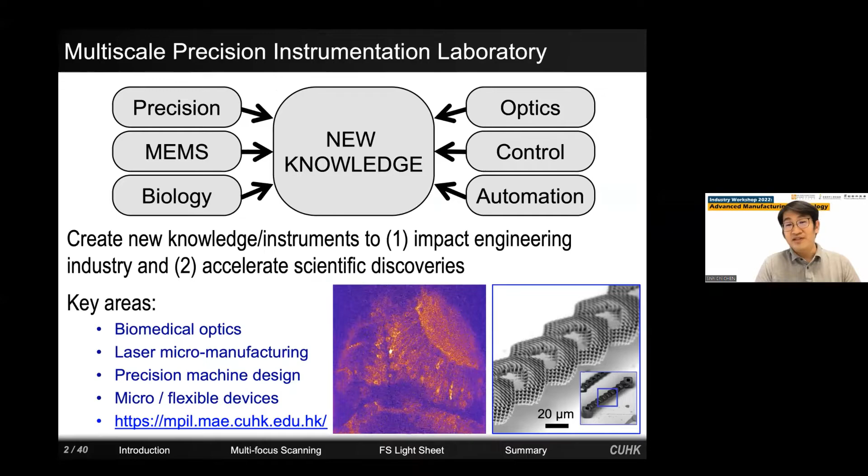I'd first like to thank Zijian for the introduction and welcome everybody to the seminar this afternoon. I'll take the opportunity to share some research progress from my lab in the area of micro-additive manufacturing and 3D nanofabrication. Before I start, I'll briefly introduce my lab. Our lab focuses on generating scientific knowledge in designing ultra-fast imaging systems, precision machines, and laser fabrication systems. Today we'll be focusing on laser fabrication systems.

3D printing technology has revolutionized the engineering industry in the past two decades. Although there has been a lot of rapid progress and development in the field, there are still great challenges, especially in the area of micro-additive manufacturing. Although there are methods that can create sub-200 nanometer features in 3 dimensions, the speed is prohibitively slow and the cost is extremely high.

I'll give an example. If you want to print a cubic centimeter sized object with 200 nanometer resolution, it would typically take 1 or 2 months and cost around hundreds of thousands of dollars. That is not practical for any industrial application.

So what if we were able to print sub-100 nanometer resolution at the scale and speed of a regular 3D printer, as shown on the right, at the same cost, and using all kinds of materials? Then we believe the engineering design process would be revolutionized again. Today I'll share with you some of our work that sheds light on this ultimate goal.

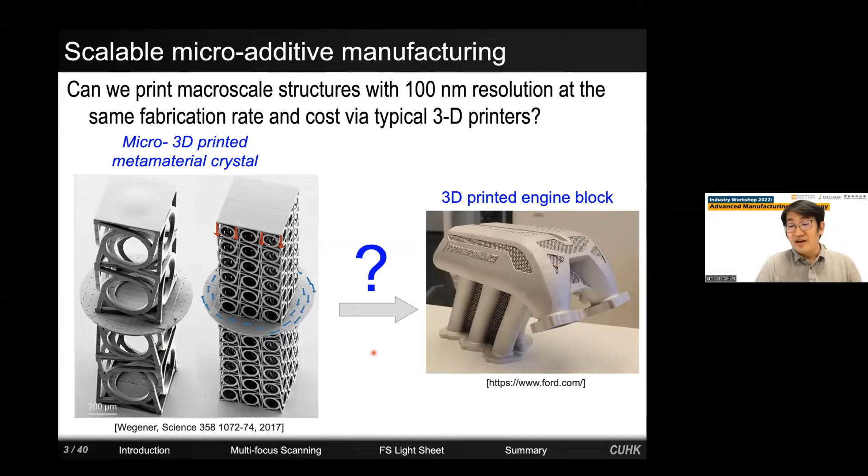To begin, I'll introduce the most precise 3D printing process: two-photon polymerization. The technology was first introduced in the late 90s, and everybody learned about it in 2001 through the seminal work from Kawata's group in Japan. Now everybody knows this nano-ox.

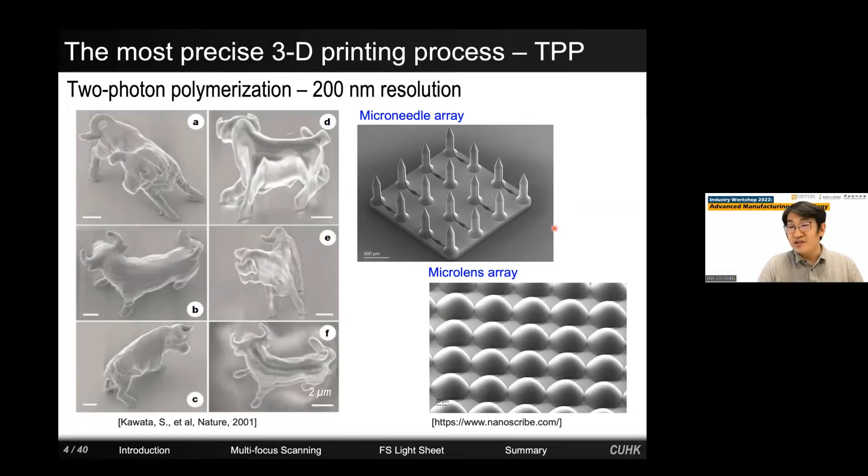A few years later, the technology was commercialized by a German company called Nanoscribe. Today, most universities and research institutions have a unit from Nanoscribe to print various micro to nanoscale devices for experimental verification or scientific research. The upper right corner shows a microneedle array for drug delivery applications, and the bottom right corner shows a micro lens array for imaging systems.

Although TPP is a photopolymerization process, you can actually extend the material to other areas through different methods. On the left, if you print TPP as a template and combine it with electroplating, you can create pure metallic structures. Many people also mix nanoparticles with photoresin to make functional devices directly - this example on the right shows piezoelectric devices printed directly.

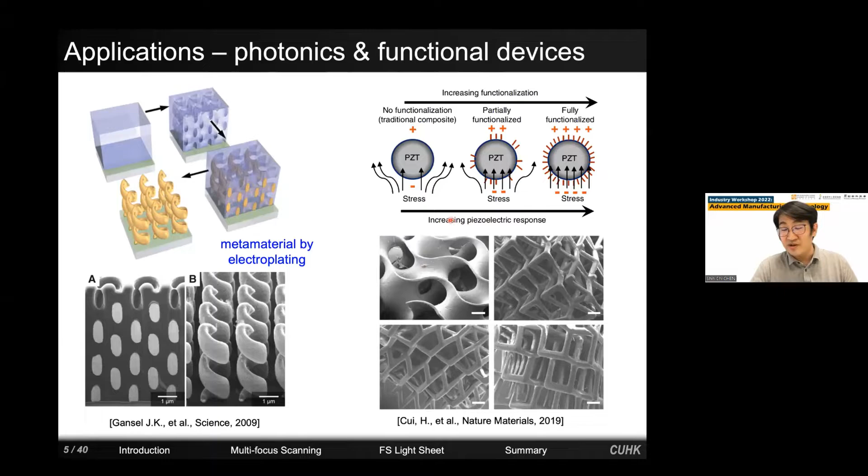If you mix in magnetic particles, you can create micro robots maneuverable in the body, or in vivo, which is a fast growing field. Another big area of application is directly printing biocompatible and biodegradable tissue scaffolds. All of these have been limited by high cost and slow printing speed.

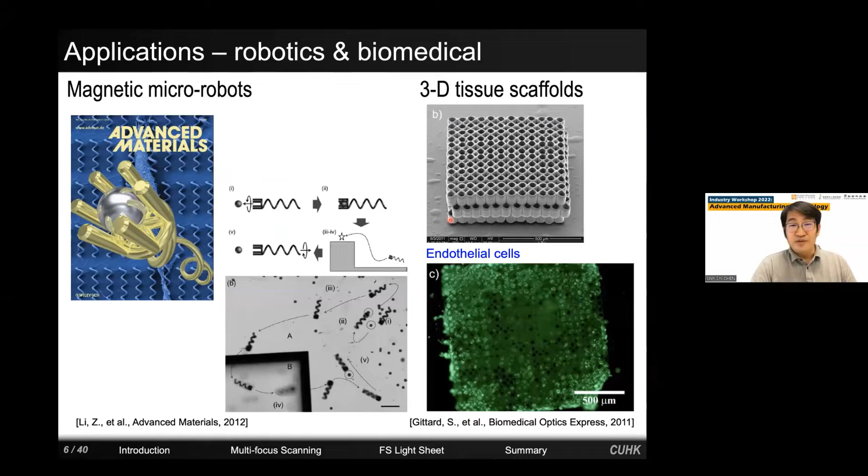If you wonder what TPP can do in terms of high throughput fabrication, in comparison with e-beam lithography or very expensive diamond turning, TPP can be used to make metallic molds. You start by fabricating complex 2D or 3D structures, then electroplate to make a metallic mold - of course, the polarity is inversed - and then you can use it with injection molding to make various parts.

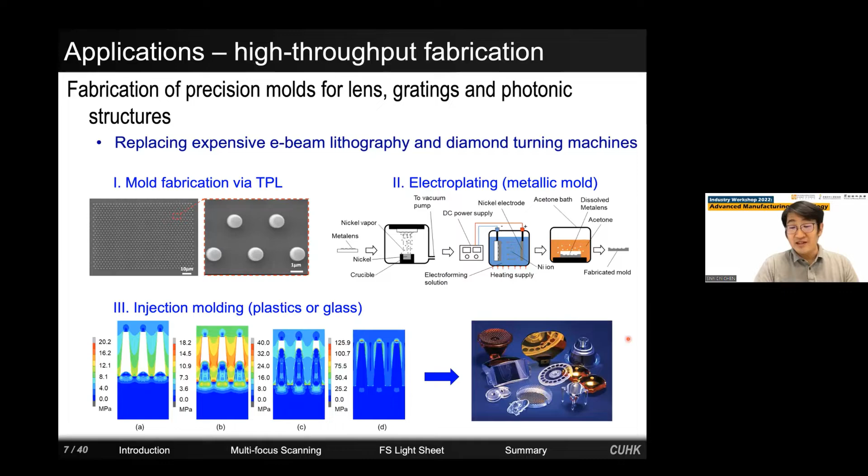And this will be one low-cost way to fast develop prototypes. Of course, this needs to be established on the fact that TPP is a low-cost and efficient process.

So next, let me briefly talk about the basic principle of two-photon polymerization. This is a process enabled by a nonlinear two-photon absorption process, enabled by the ultra-high peak power femtosecond laser. Due to the extreme high power within the focal point, two photons will be absorbed by an electron, as shown in the Jablonski diagram on the left.

It goes to higher energy states and releases free radicals that generate the photopolymerization process. In comparison with a conventional stereolithography process, the two-photon process has depth discrimination. In other words, it only polymerizes material within the focal point, which is much smaller than a size of 1 cubic micron. It is also very sensitive to a polymerization threshold.

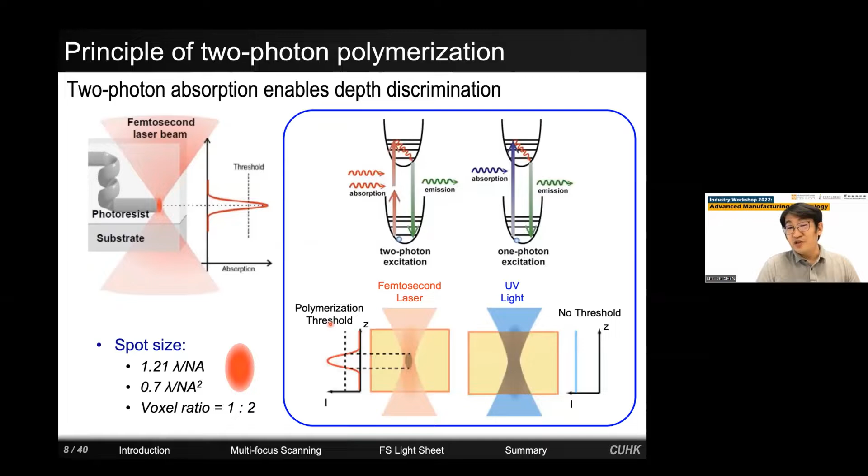So if you finely control the laser power, you can write structures much smaller than the diffraction limit. And that's why much smaller features than the wavelength of light can be created.

So this is what's been done in the past. People pair the femtosecond laser with a pair of scanning mirrors. As a result, by raster scanning the laser focus, voxels can be created in a line-by-line, layer-by-layer fashion. When one layer is completed, the laser is moved to the second layer by a specimen stage or piezoelectric objective scanner to complete the 3D fabrication process. And this is very slow.

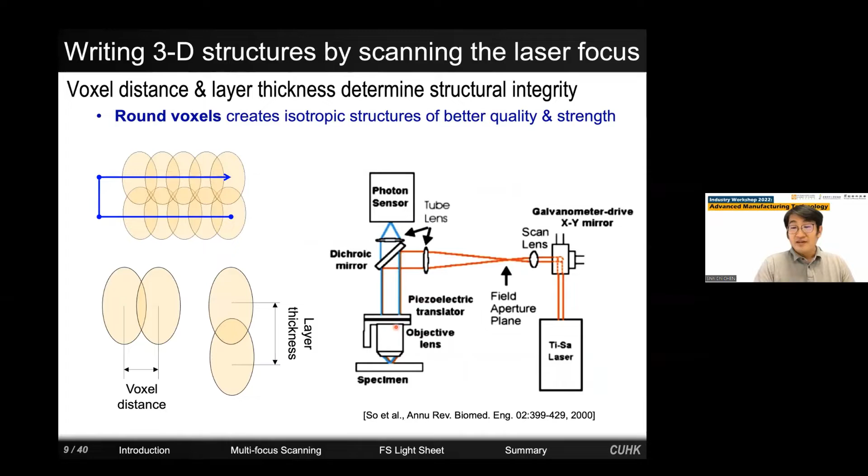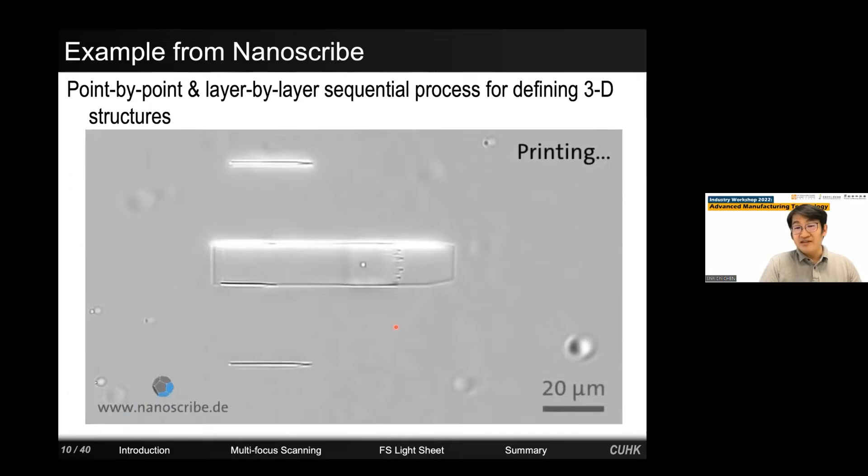This video taken from Nanoscribe illustrates this process. You can see, to print an aircraft as shown here, the laser is raster scanned horizontally as the fast axis, vertically as the secondary slow axis, and then it moves to the next plane. Although this process seems fast here, it is extremely slow because the entire thing is smaller than the diameter of your hair.

Let me talk about more of the process. During printing, the objective lens is immersed in the photoresin, which is in liquid form and has a refractive index of 1.5. So in order to ensure high resolution, a matching index objective lens is used - typically an oil immersion lens.

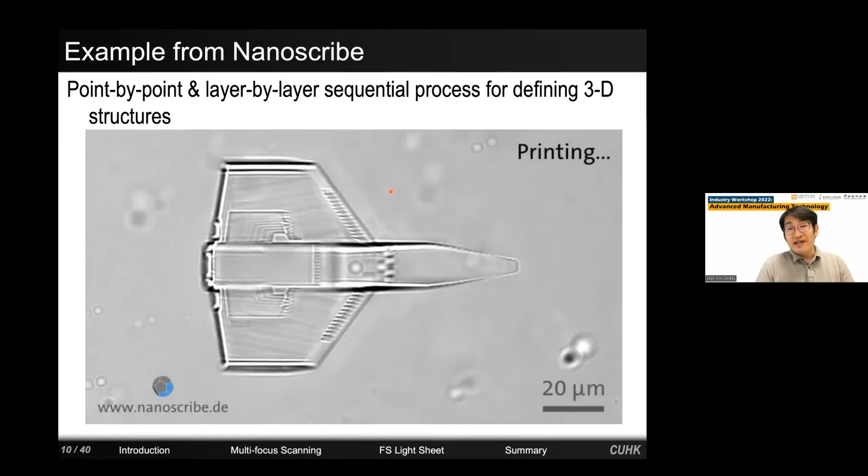After fabrication, you take out the sample and develop it, and you can visualize the result in a high resolution electron microscope, as shown here.

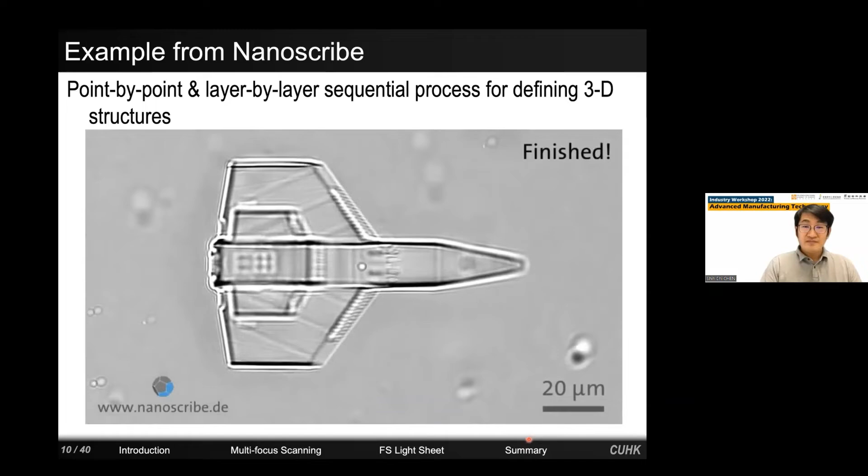So to make it practical, not just me - a lot of people have been trying to speed up the process. One straightforward solution is to use multiple laser foci. You can split the laser focus, for example by using micro lens arrays or diffractive optical elements. But that usually has a fixed focus pattern, so you can only write periodic structures, and also the focus quality is compromised.

So we want to address the issue with a different approach - to efficiently and quickly manipulate the laser wavefront. First, we surveyed different spatial light modulators: liquid crystal spatial light modulators, deformable mirrors. In the end, we decided to use a very unique device, the digital micromirror device.

This device, everybody here online has actually seen before, because it is the very chip used in every projector in every movie theater, made by Texas Instruments. DMD, as a result, is very high resolution nowadays - it's 4K. It's also very high speed, up to 32 kilohertz. Each mirror is a binary display; it only has plus or minus 10-degree positions.

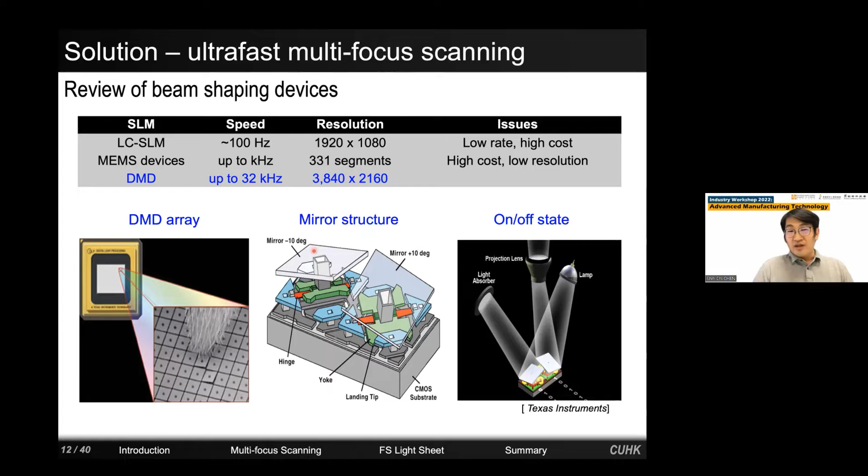When we combine a DMD with the femtosecond laser, it becomes an ultra-fast scanner. What we do is design specific holograms, and because the DMD is binary, we design binary holograms and place them on the DMD. Then the femtosecond laser is introduced to the DMD as a reference beam, and as a result, the designed hologram is recreated.

Some people may wonder how come this was not done in the past. The reason is that for the longest time, DMD was considered incompatible with the femtosecond laser, because the pixels on the DMD are too small, which causes dispersion. We addressed this issue with a dispersion compensation design, as shown in the US patent here. As a result, when we measure the pulse width after the DMD, it shows a very narrow pulse width, and the dispersion effect has been entirely removed.

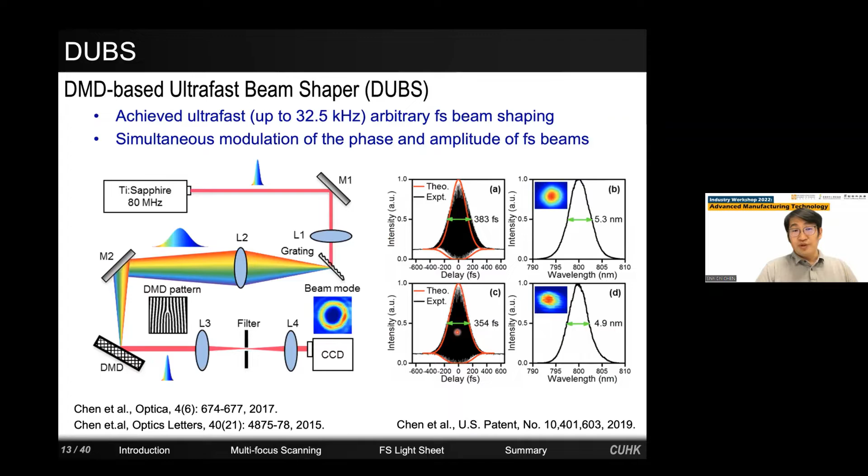Fortunately, the design of digital hologram theory was already derived in the 1970s. So whatever wavefront information we want to create, we just convert it from the analog equation form into digital form through the inequality shown here. We substitute into this equation, and if it satisfies the inequality, we assign a value of 1, and otherwise 0.

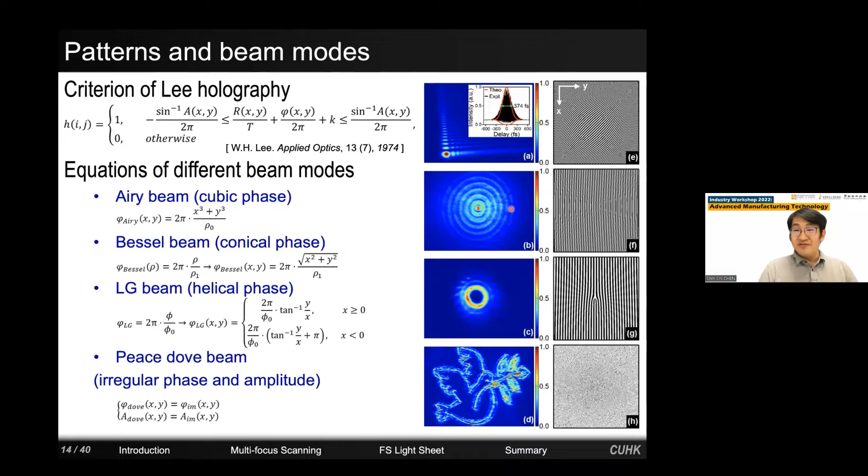So everything turns into a black and white picture on the DMD as shown on the right, and on the left shows the recreated wavefront.

Based on our calculation, under a 40x objective lens, we can fast control the focal point in the axial direction for about 500 microns and laterally for about 200 microns, with accuracy and minimum step size of about 100 nanometers, which is sufficient for our target application.

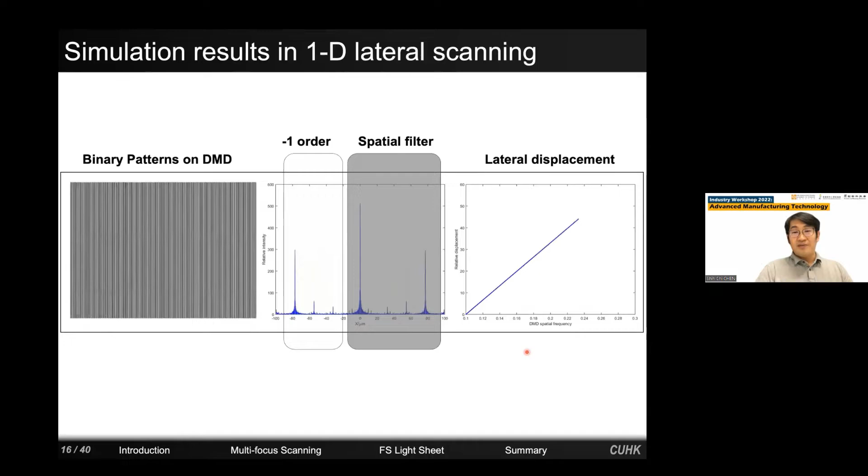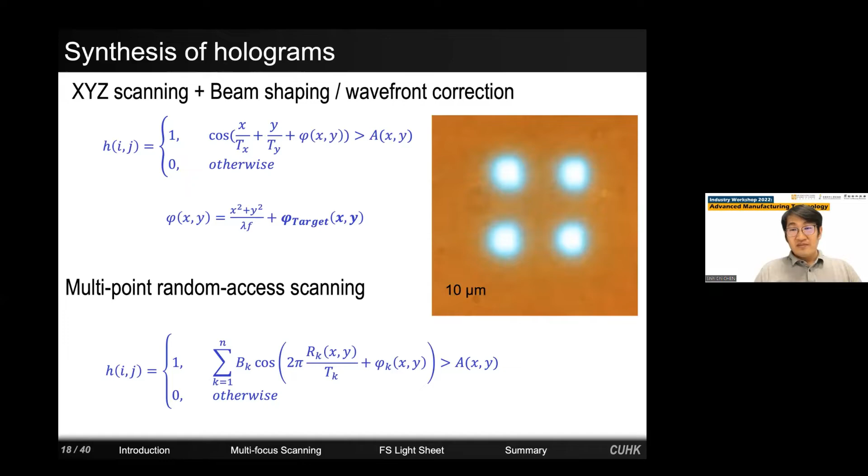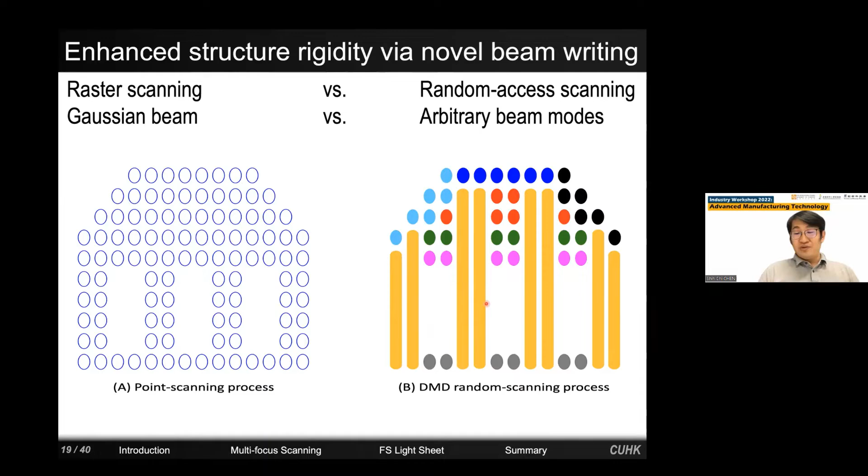So here we briefly compare the difference between the conventional process and our random access scanning process using this 2D dome. In raster scanning, the conventional process, the laser has to be scanned layer by layer. So even if you have empty spots, you have to scan through them and just turn off the shutter. In our process shown on the right, each color represents one exposure, so we can expose multiple points simultaneously. We can build these pillars through a different beam mode, for example, the Bessel beam. As a result, these empty spaces, we don't really need to go there. Based on this principle, we increase the fabrication speed by around 2 orders of magnitude compared with the point scanning process.

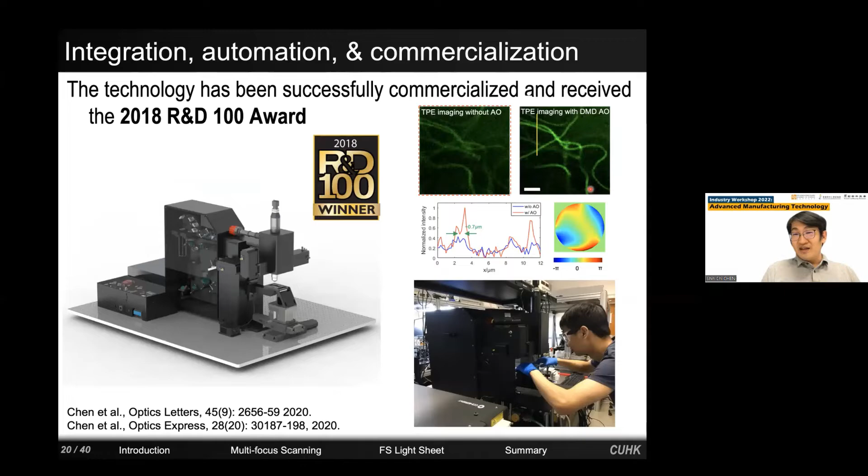So in 2018, we received the R&D 100 award for developing this prototype. It is simultaneously a 2-photon imaging system that people use to study brain and neuron activities in vivo.

And you can see some of the high resolution structures printed in our earlier system in 2019. You can see individual voxels overlapped in this high resolution SEM images.

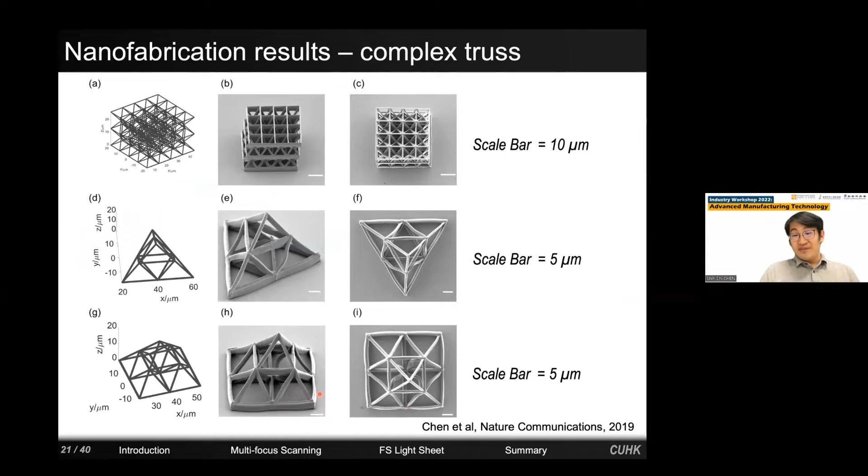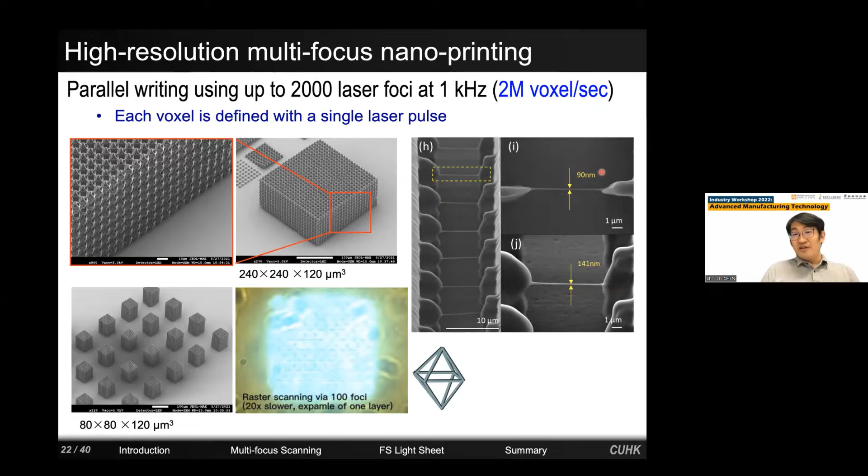In the recent 1 or 2 years, we further enhanced the performance of the system by using a regenerative laser amplifier. Nowadays, we can use up to 2,000 laser foci, achieving a 2 million voxel per second writing speed and breaking the record of resolution down to 90 nanometers.

So to quickly summarize, we use a digital micromirror device to perform high-speed multi-focus scanning, and each focus is individually programmable and can perform random access scanning. In fact, each focus can also carry different laser power, so they achieve grayscale control. A very, very capable system to create 3-dimensional structures.

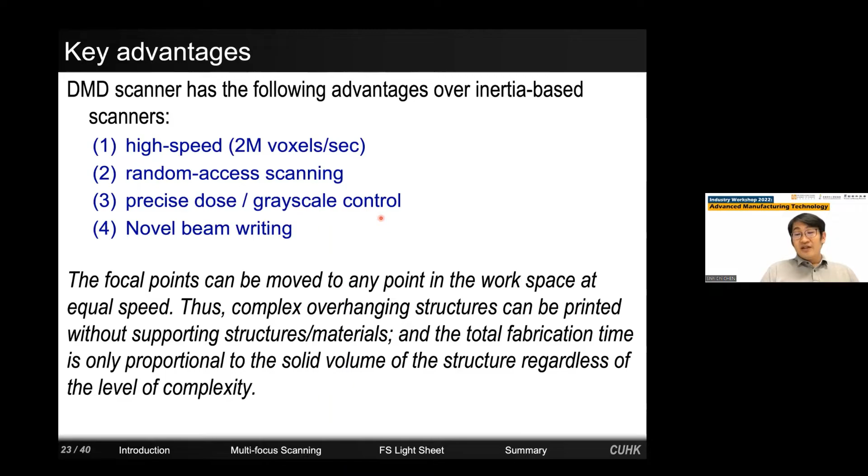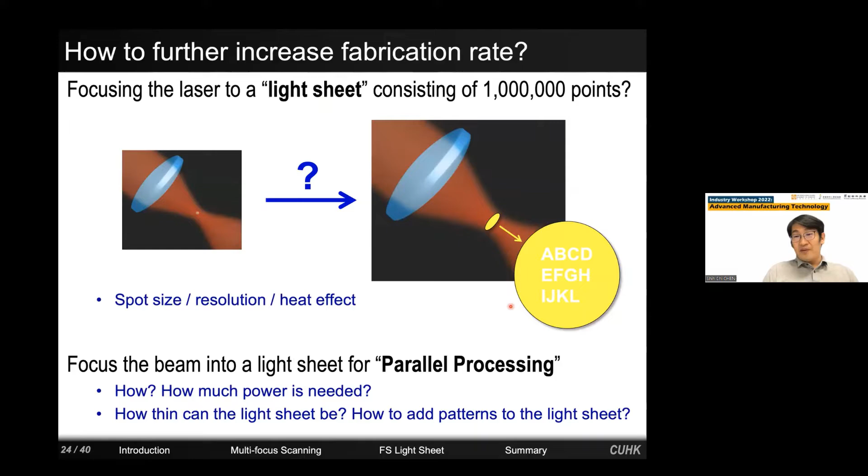But we are not satisfied with the performance. To further enhance the speed, we came up with another idea. Instead of splitting the laser focus, we wondered whether we could focus the laser, not into a point, but into a thin light sheet, which contains millions of points. And on the light sheet, is it possible that we create patterns? And the answer is, of course, yes.

To introduce the principle, let's briefly talk about the basic properties of femtosecond laser. As I mentioned, femtosecond laser refers to a pulse laser with a very narrow pulse width of 100 femtoseconds. If you consider the time bandwidth product as a constant, you'll realize that femtosecond laser contains many different colors, unlike continuous wave laser, so the bandwidth is wide. That's why the DMD would cause dispersion in the first holography technique. We want to avoid this.

In this technique, the so-called temporal focusing technique, we actually exploit and take advantage of the dispersion effect. The femtosecond laser is brought to an optical grating, and as a result, different color spectrums are dispersed. When dispersion occurs, the laser peak power is lower and cannot perform multi-photon absorption or excitation effect. Then all these dispersed spectra are recombined, and only at the focal region are they overlapping. As a result, it forms a thin light sheet at the focal region, and right after the focal region, the light becomes dispersed again.

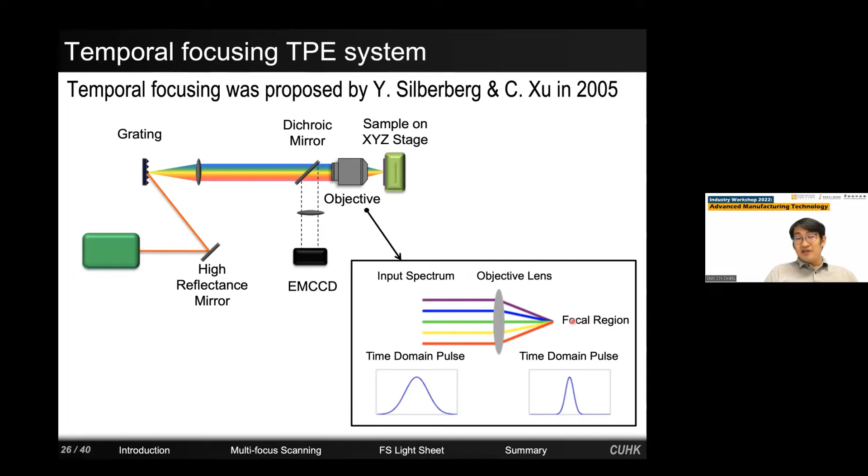In a temporal focusing system, we do not focus the laser beam. The laser beam diameter is adjusted to be equivalent to the processing area. Along the light path, the pulse width is varying instead, and only at the focal plane is the pulse width narrow enough to have a multi-photon effect.

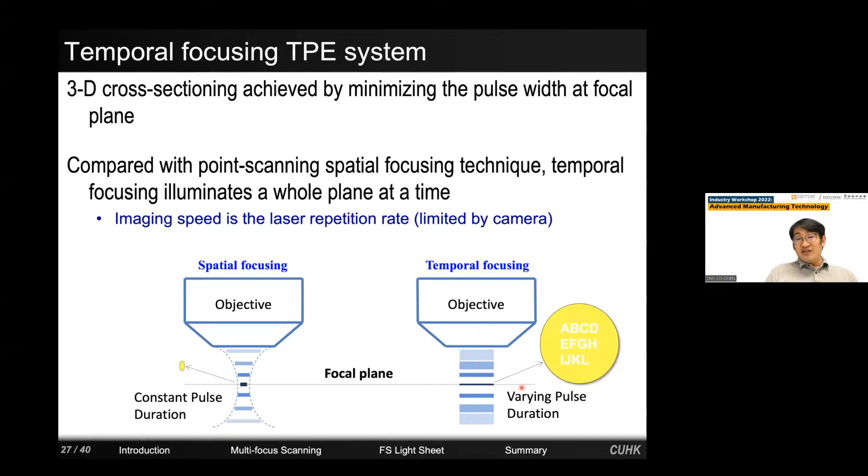This idea was not invented by our group, but by some microscopists in 2005. In order to use this for fabrication, we have to generate specific patterns on the light sheet in order to perform fabrication. So that's where our contribution came in.

We replaced the optical grating with a digital micromirror device. As I said, the DMD is a blaze grating with an angle of 12 degrees. By selecting the proper diffraction order in an experiment, the -5th order diffraction, we can achieve high laser efficiency, around 50%, and implement temporal focusing.

As a result, the DMD surface and the work plane are in conjugation, so whichever pattern is displayed on the DMD will be displayed here. Next, by axially moving the focal or light sheet around, and changing the pattern accordingly, we can create arbitrary structures at high speed.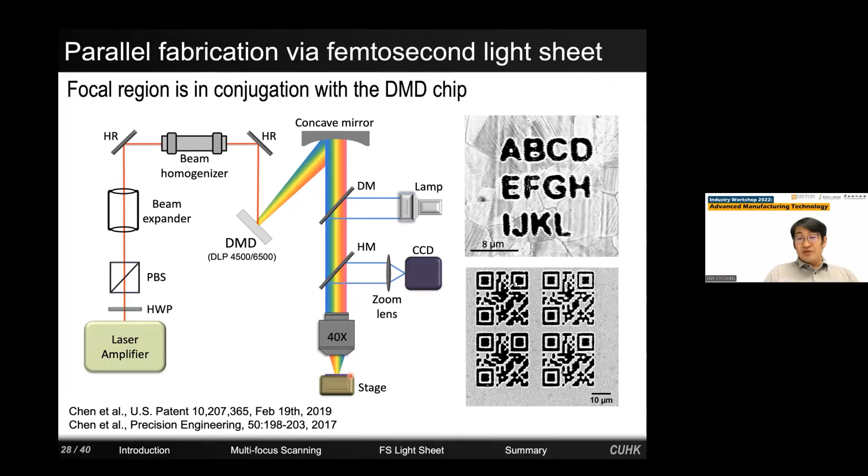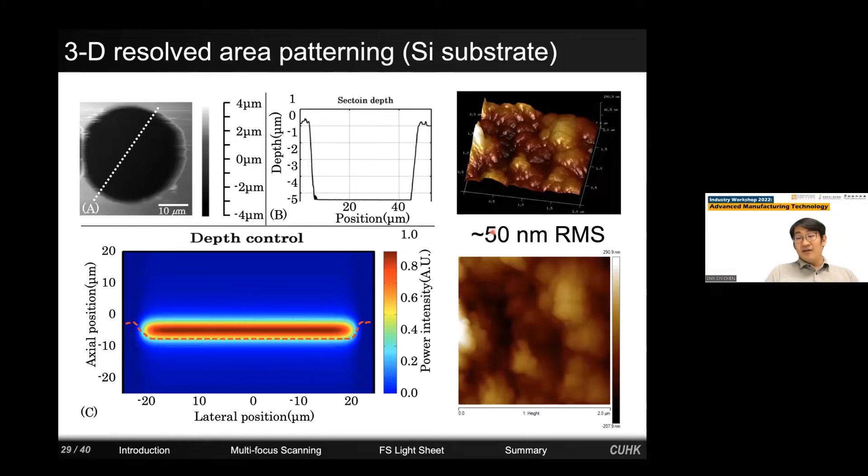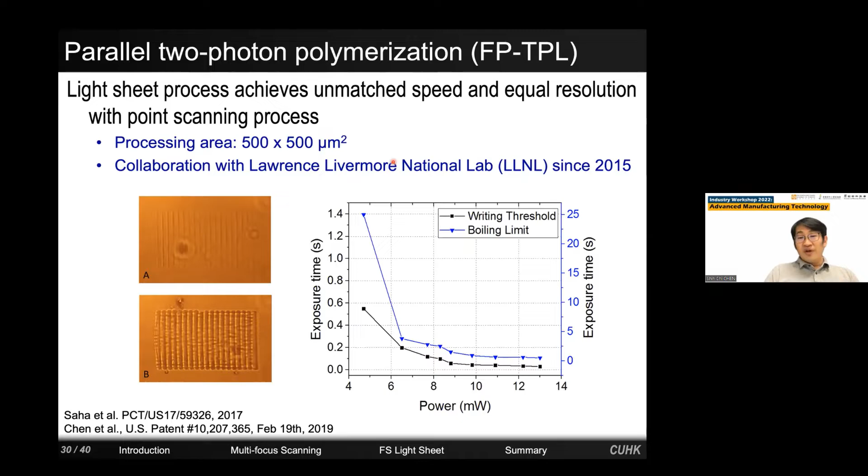We apply this to two-photon polymerization, working with Lawrence Livermore National Laboratory since 2015, where they developed custom-designed photoresins for us to use with a high-power laser regenerative amplifier.

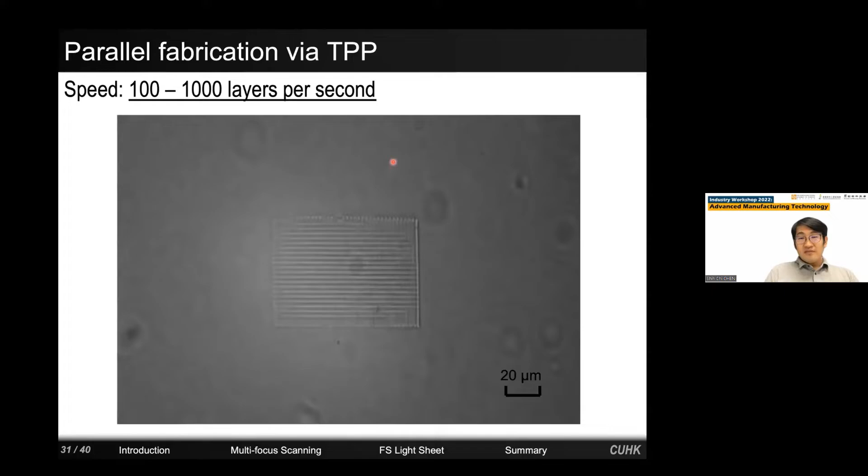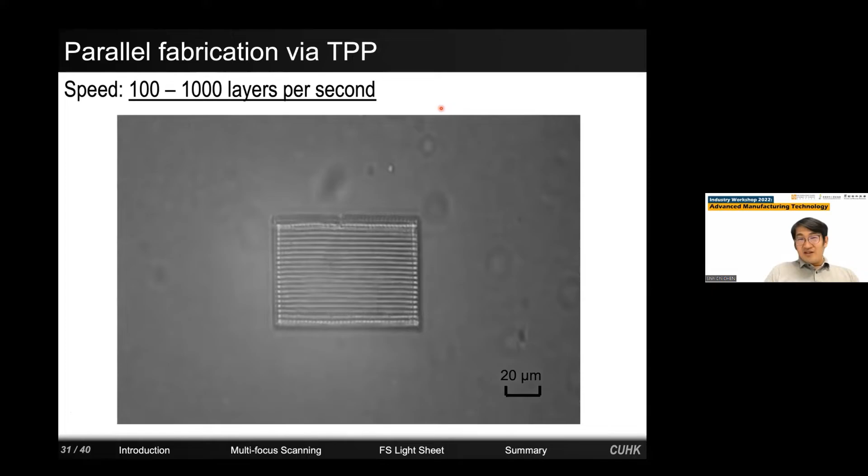Using the system here, each exposure defines a layer, but you're actually seeing slow motion, because every second we can define roughly 100 to 1,000 layers. This further pushes the fabrication rate of our previous system by one order of magnitude.

Another advantage of this system is the voxel aspect ratio is not the conventional Gaussian beam aspect ratio of 1:3. Instead, it's 1 to 1.25. This is because the voxel, or resolution, of a temporal focusing system is not determined just by the Rayleigh criteria, in other words, wavelength and numerical aperture.

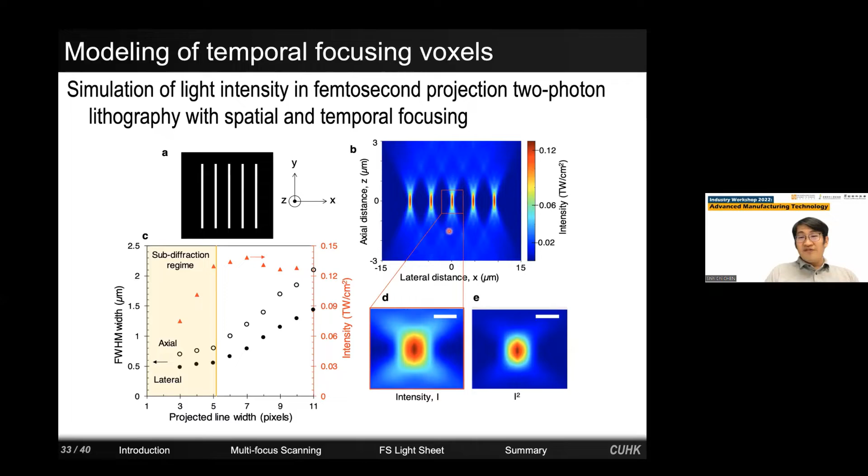It is also simultaneously determined by the pulse width. The narrower the pulse, the thinner the light sheet. So by carefully selecting the spectrum in combination with the numerical aperture and wavelength, we can tune the aspect ratio of the voxel in a temporal focusing system, as shown here.

So from a 1:3 ratio, we make it a 1 to 1.2 ratio, resulting in superior mechanical properties of the printed structures. By carefully studying the laser dosage relationship with structural integrity, we can create all kinds of 3-dimensional structures. For example, this column has a diameter roughly equivalent to your hair, and various large-scale structures that could not be created in the past.

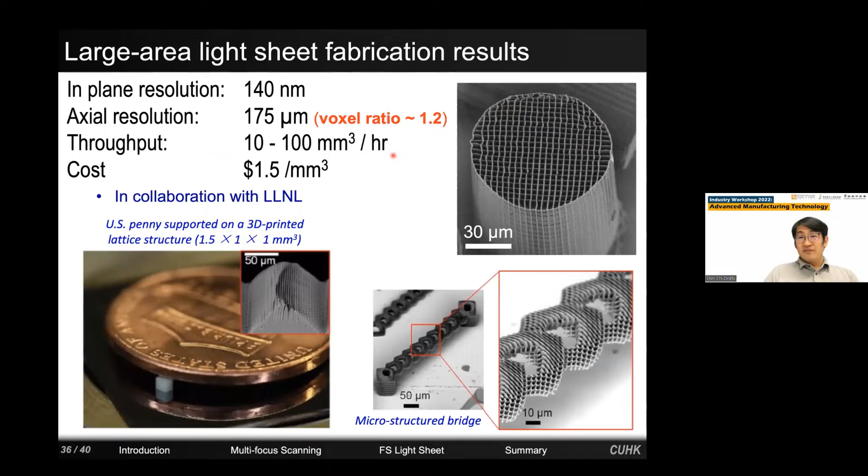The cost is also reduced by around 95%, and the throughput is now roughly 100 cubic millimeters per hour, versus originally 0.1 cubic millimeters per hour. As a result, this work was published in Science magazine.

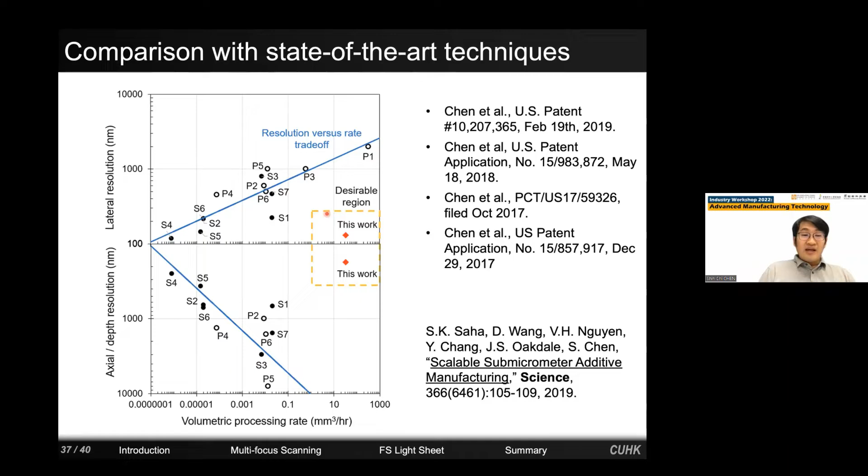But there is a limit on the resolution we can achieve, roughly 100 nanometers. On the other hand, many metastructures, especially in visible light applications predicted by scientists, require features below 50 nanometers. That's an area we are working on right now, and with limited time, I can briefly talk about the idea.

Essentially, we use a hydrogel as substrate because hydrogel is swellable. So we print structure on the hydrogel in an expanded state using our light sheet system. After that, we follow with a material deposition process, and lastly, we shrink the hydrogel by putting it into hydrochloric acid.

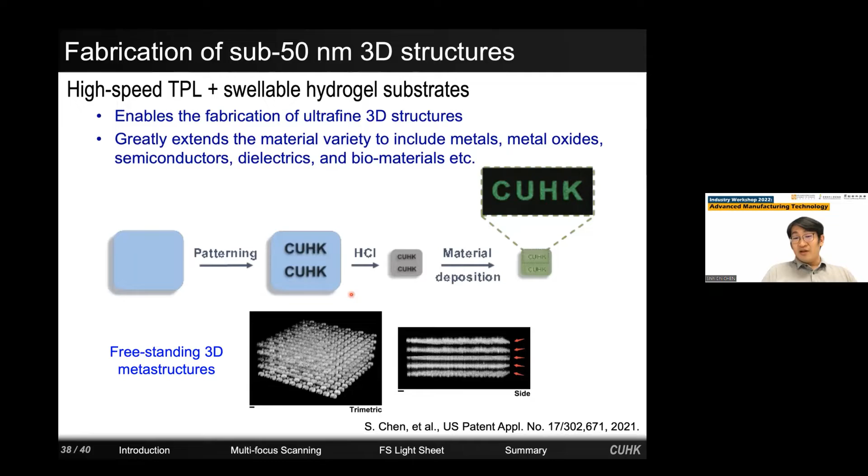As a result, we can create all these freestanding three-dimensional metastructures at 20 nanometer resolution, and you can see the resolution test shows less than 50 nanometers. We also try with different materials, now including metals, metal alloys, metal oxides, semiconductors, or even biomaterials.

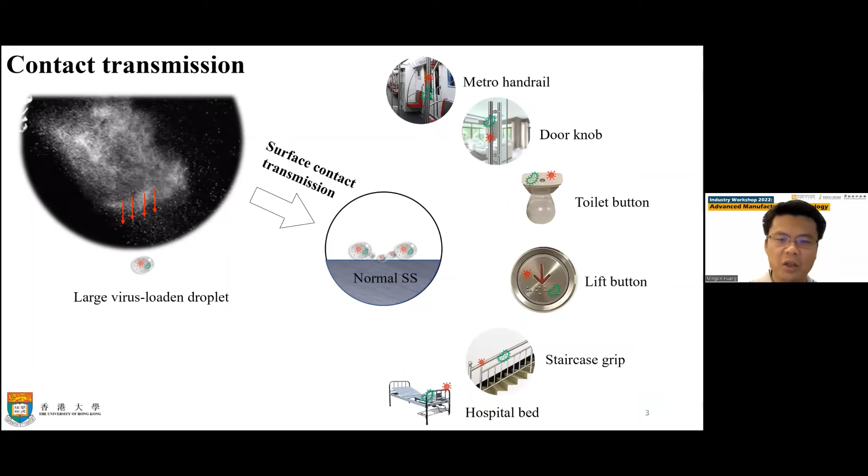So if you remember, at the very beginning of the pandemic, you saw many people when they go into the lift, they would use their key or a tissue to push the lift buttons. We were seeing that, and there was an inspiration - why not, if we are able to develop a stainless steel, but not using coating, because if you use coating on the surface for antivirus, with time this coating will disappear. So the idea is that if we are able to develop a stainless steel which can be used for permanent antivirus properties, that means you don't need coating. The stainless steel itself must have this antivirus property. So that's the driving force behind why we tried to develop this new stainless steel with antivirus properties.

So after we did this, we made this stainless steel with a special chemical composition.

If you go to the literature, you can see that antibacterial stainless steel has been developed for 20 years or more. But antibacterial is different from antivirus, because bacteria and virus are very different species, so the inactivation mechanism is different. There's really no literature on stainless steel for antivirus. Stainless steel for antibacterial is available in the market, but stainless steel for antivirus is not available. So basically it's no, that's why we do it.

So we develop this. This is an experimental result, and this is a sample. How we do the testing is basically: we make a droplet containing virus content, and then we drop it onto the surface, just to simulate the contamination, like when you're speaking or coughing and droplets drop on the surface. Then we wait for a given period of time, from 1 hour to 48 hours, and try to measure the percentage of virus still viable, meaning still live virus.

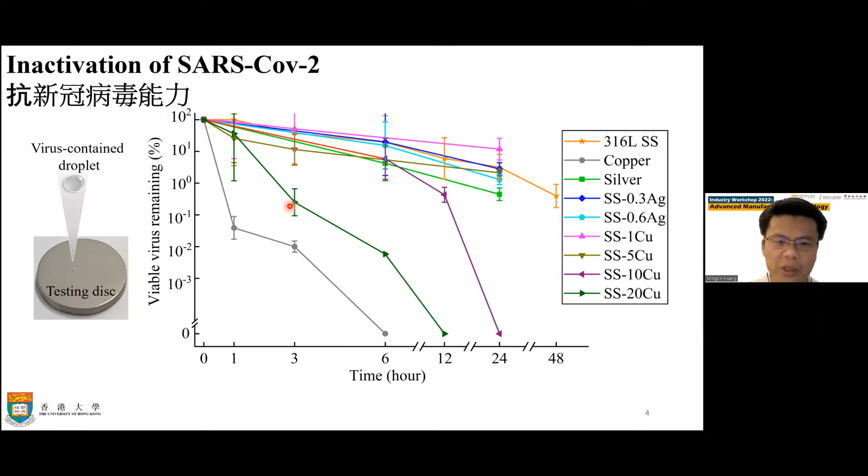Silver is only working, it's working very good for antibacterial, but it's not working for antivirus. This anti-copper, the copper works for both. But if we use pure copper it's more expensive, right? So stainless steel can lower the cost. That's why we should still do stainless steel.

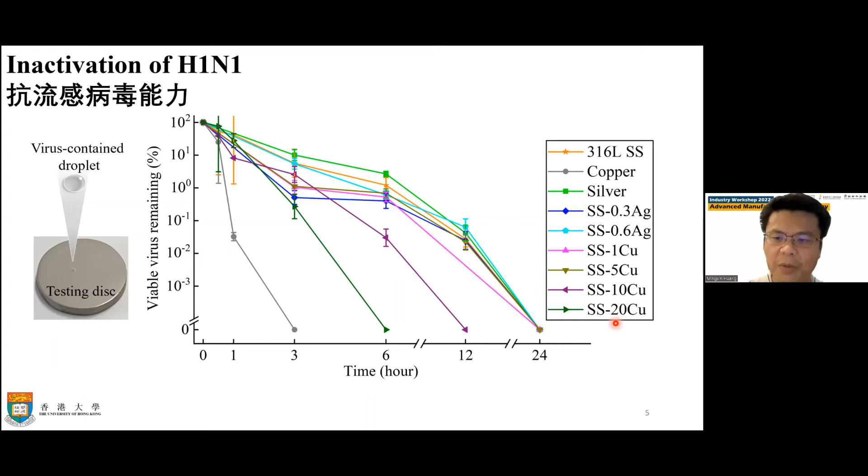In addition, the appearance of stainless steel is different. For any product, you like a stainless steel property, like the hardness, the strength, the wear resistance, the cost, and in this case, stainless steel always better than the copper. So for like lift buttons, you don't use pure copper to make lift buttons, but you use stainless steel, or the hand, also other applications where you have stainless steel, but you don't use pure coppers.

In addition to the antivirus properties, we also check our antibacterial properties. So clearly, pure copper is also very good - if you don't see any bacteria here, okay? So this is the stainless steel. After 24 hours, you see a lot of bacteria. So it means normal stainless steel doesn't have this antibacterial property, also does not have the antivirus properties.

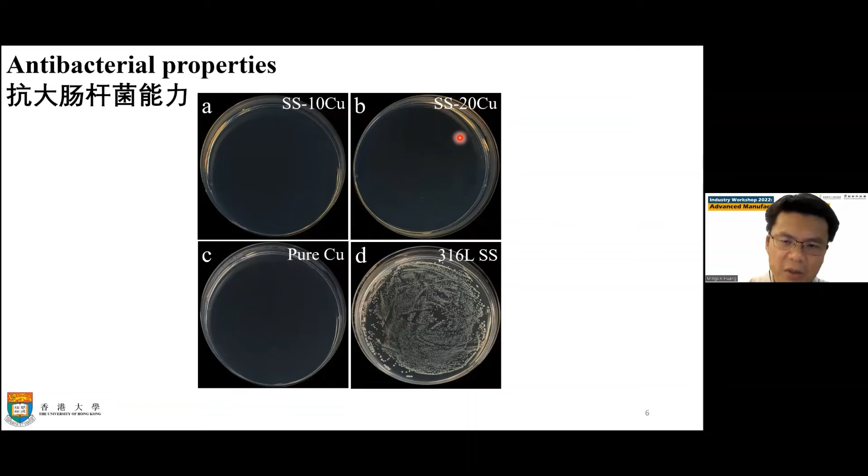But for pure copper, you have the antivirus property, you also have antibacterial properties. So for our materials with 10% or 20% copper, you also have excellent antibacterial properties. So in short, this stainless steel with 20% has the best antivirus and also antibacterial properties.

The reason why our stainless steel can have this antibacterial properties - if you look at the microstructure, so it's 10% of the copper, you will see that all these white dots are copper precipitates. Now this color here represents the copper. You also see the X-ray, these are EDX. For the EDX, you also see this copper here. So clearly, we have this copper precipitation in this stainless steel.

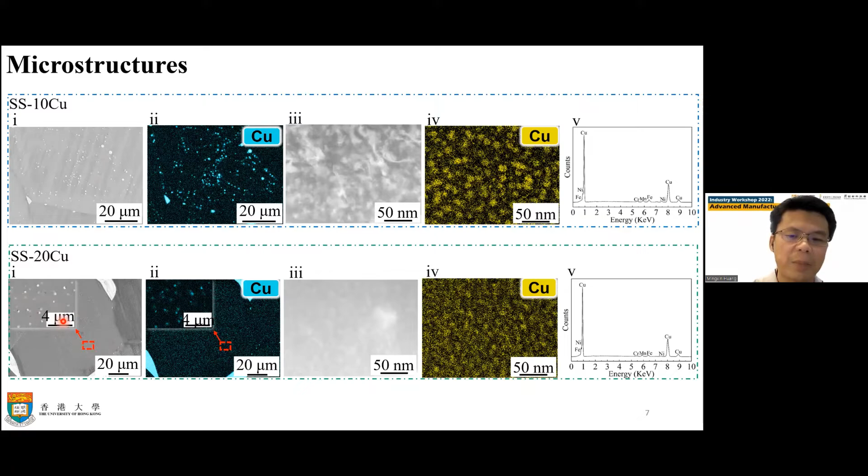In the normal stainless steel, you do not have these copper precipitations. For higher copper contents, we are going to see more of this copper precipitation. So basically, we change the microstructure of the steel. And we also check the concentration of the copper ions.

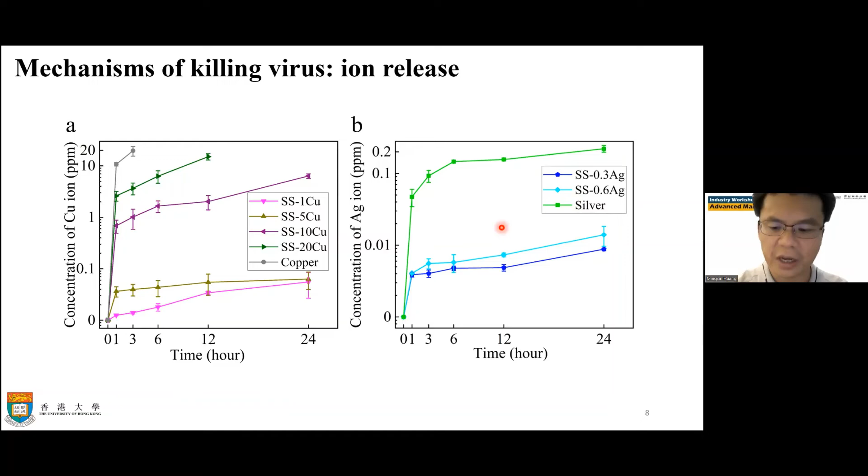We also check similar for this silver. You will see the values here is 20 ppm. Silver ions are very low, so 0.2. That could be also one of the reasons why the pure silver does not have this antivirus or antibacterial properties.

So basically what we are doing, we try to make a demonstration whether or not our stainless steel can be used in a daily life product, like lift buttons or in other applications. So we make the lift buttons using our stainless steel based on a powder metallurgy technique. We can also do casting, conventional casting, to make this one, but conventional casting may have some technical challenges to be solved. But we are working on that now to solve the technical challenges if we're using conventional casting to contain such high copper content.

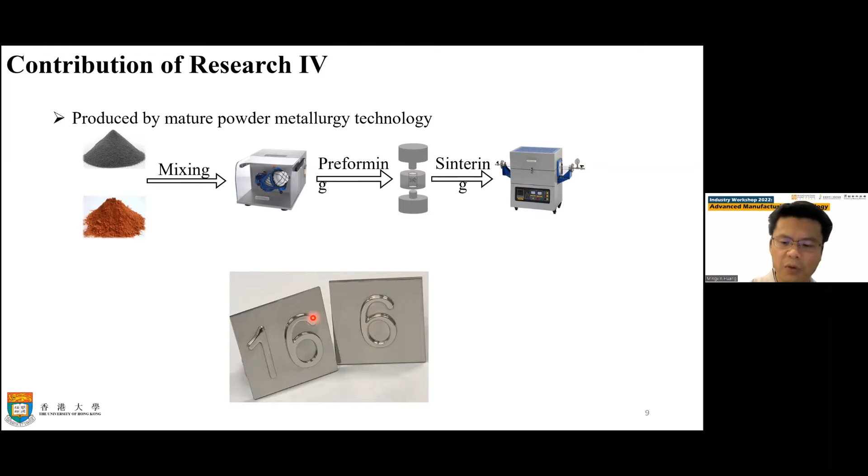If we use powder metallurgy, it's quite easy, and powder metallurgy is a well-established technology that can be available easily. So by powder metallurgy or sintering, now we can make these products, which we already can be already done. So we have a patent applied already, and this patent was awarded a silver medal in this Geneva invention, and we also published this one in a scientific journal.

And actually it's also very interesting - it has been, when we have this press conference overseas, many companies are actually contacting Hong Kong U for potential applications, and we even have interviews at BBC, really showing interest. And we are also discussing with some of the companies at this moment to see if we can license the patents for them to make daily products using stainless steel.

So I would like to summarize that we have invented a new stainless steel containing a high copper content that can kill viruses, including COVID-19 and also influenza virus, and also bacteria. And these products can be made using existing industrial facilities, and with a low cost, which I really hope that we can make it into a daily product. Thank you very much.